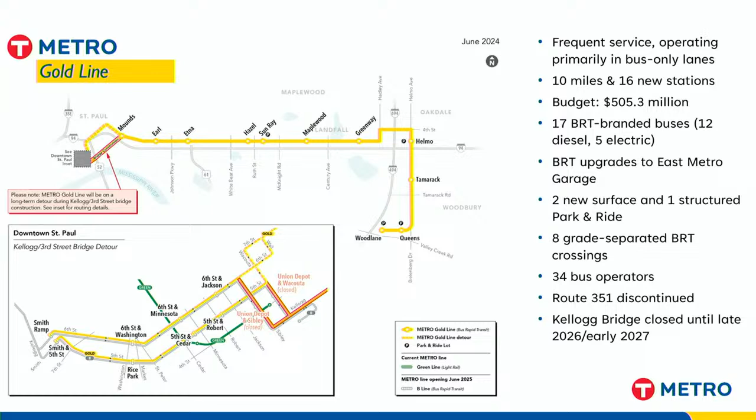We'll be hiring 34 bus operators. The pick started, and training and all the materials are ready to go. Training will start next week for the operators, and Jonathan will talk about that. Route 351, which is an express route from Woodbury to downtown St. Paul, is going to be discontinued when the service starts on March 22nd. And I talked about the Kellogg Bridge.

So Gold Line funding: we have many funding sources for the project. In addition to our New Starts Capital Investment Grant, our CIG grant, we have several regional solicitation grants that add up to just shy of $260 million. We do have state funding that helps contribute to several bridges and pedestrian bridges. We'll show some photos of those, and then of course our local funding partners.

Ramsey County and Washington County have been a big part of the project. They were big promoters and champions of the project since the beginning, and so they're an important part of our service. They're actually also paying for free rides for the first week, we'll talk about that later. And then there's additional investment from local funding partners, since we were doing so much ripping up and reconstructing of roads. It was a great time for our local funding partners to contribute their own funding for utility replacements, trails, lighting, and landscaping.

So I'll show a lot of photos, but just to give a quick overview of where we are with construction. We're substantially complete on both our two larger projects, our civil project and our Woodlane Park and Ride project. There are some crews still working, you might see them. The cold temps the past few weeks have not helped us, but we've had a great winter, which has helped us.

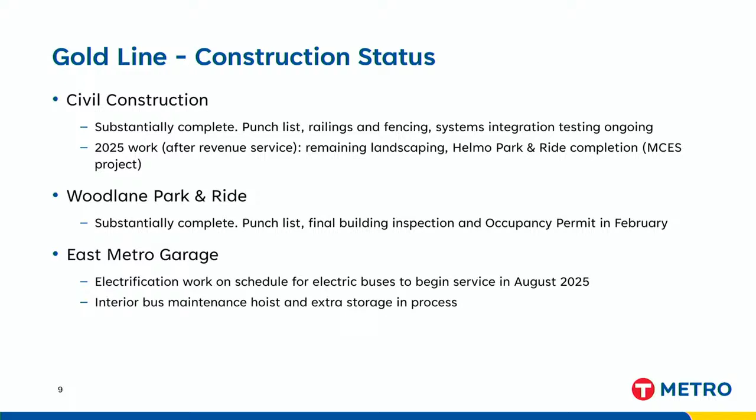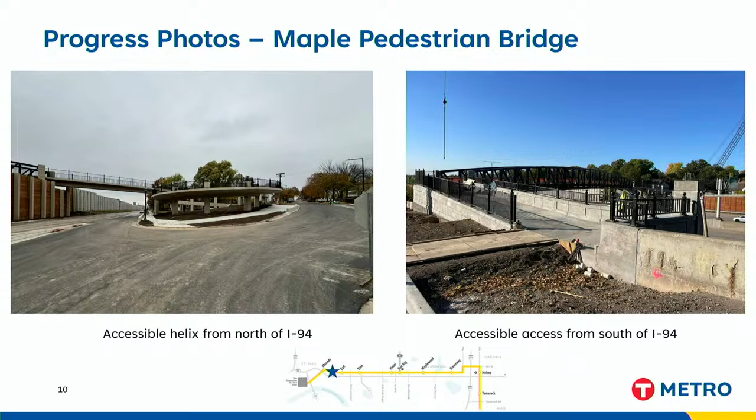So some photos. This is the Maple Pedestrian Bridge in St. Paul. This was a facility that did not meet accessibility needs, and so it was reconstructed. This is one of the items we received additional funding from the state for, but it's actually a pretty beautiful bridge if you like ped bridges, and it's a great asset to the community. So happy that that facility got rebuilt in St. Paul.

So I have a couple of photos showing the guideway. The photo on the left is the Ruth Underpass, that's in St. Paul, and the photo on the right is in Oakdale, on 4th Street approaching Hayward. Just a couple things to point out: the photo on the left is pretty much just north of Interstate 94, so that's where the BRT guideway is in its own dedicated right-of-way. The photo on the right, we're center running with 4th Street on the outside lanes.

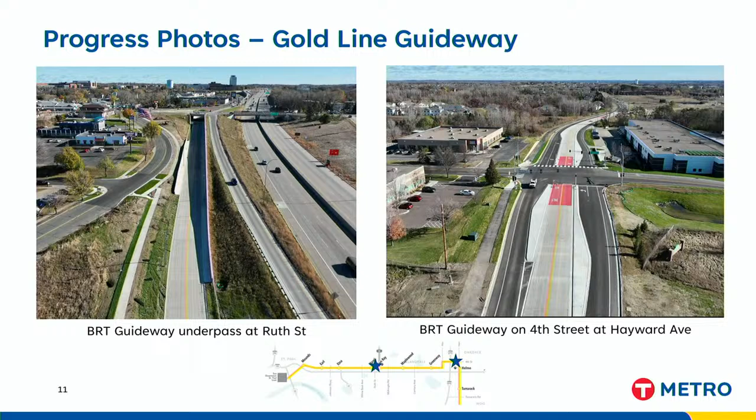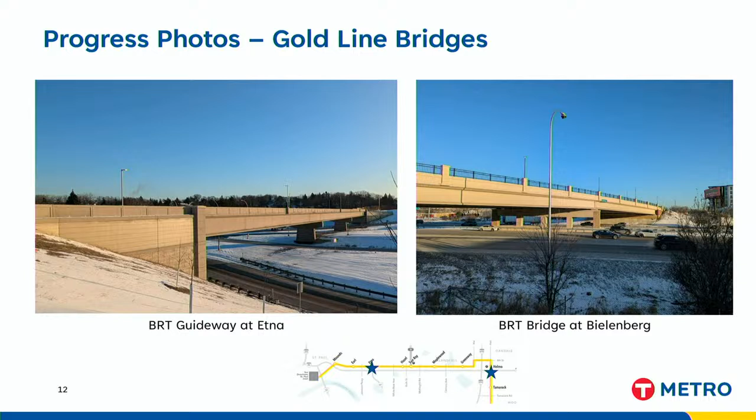Couple bridge photos. The photo on the left is showing the Etna Bridge, just east of the Etna station - it's a BRT only facility in St. Paul. The photo on the right is the new bridge at Bielenberg. This was a completely new crossing of Interstate 94. It took a lot of work to get to that point. This facility will accommodate not only BRT but also vehicles and trails, and it really is a great new connection between Oakdale and Woodbury.

Stations - we built several beautiful stations. The photo on the left is the Earl Street Station in St. Paul. The photo on the right is our only unique crossover station, kind of similar to the 35W at 46th Street Station in Minneapolis, where the buses cross in opposite directions. We're introducing bar signals along this alignment, similar to light rail signals with a vertical or horizontal bar. We have several of these at this station to keep those bus operators safe.

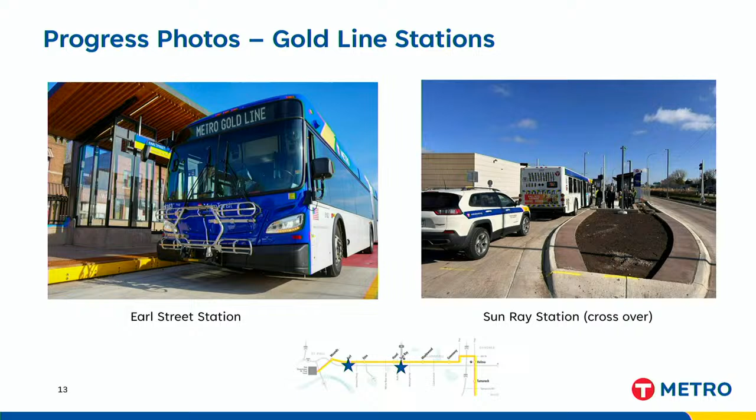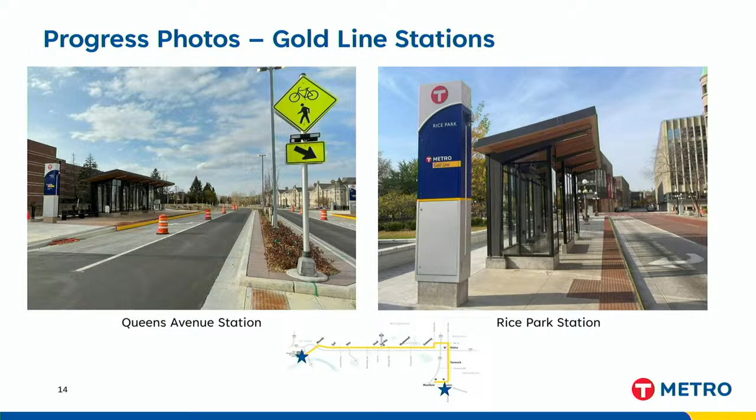More pictures of stations. The photo on the left is the Queens Avenue Station in Woodbury. The photo on the right is one you might have seen in downtown St. Paul at Rice Park. And then, we've done a lot of pedestrian improvements along this corridor, so just wanted to highlight a couple of those.

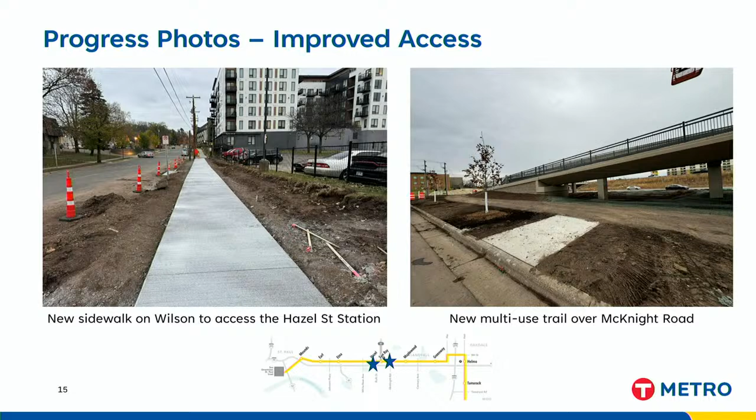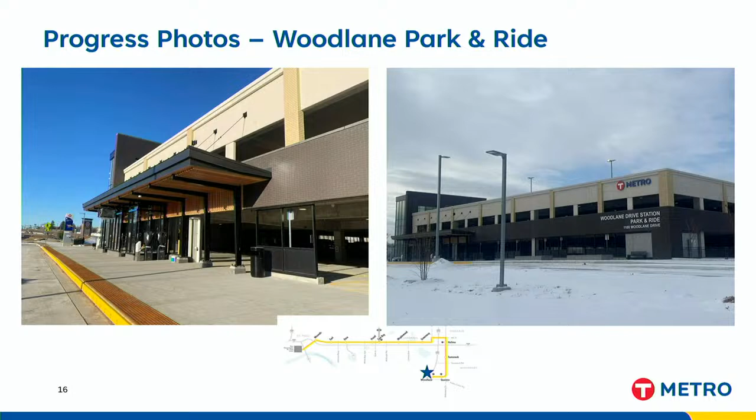And then the Woodlane Park and Ride. This is our large park and ride at the end of the facility with over 500 parking spaces. We also accommodated one of the biggest needs we have in our system for bus operators - there's a bus operator restroom, break area, and quiet room at this location. We also have storage for facilities under the speed ramp as it goes up. There's a huge room for storage, which is great for facilities maintenance.

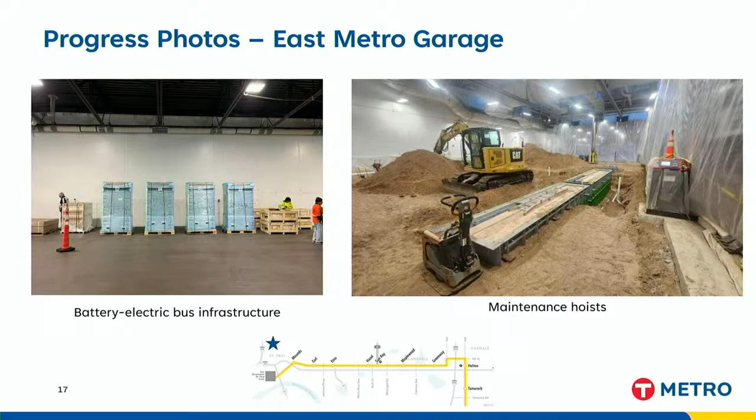And then finally, East Metro Garage. The photo on the left is showing the battery electric bus chargers, and the photo on the right is installation of one of the new hoists.

As you can imagine, with this much new infrastructure, one of the items our staff is working on feverishly right now is operations and maintenance agreements. We have many agreements that have been executed and some in progress still. We have general infrastructure agreements - hopefully next week we'll be routing an agreement for execution with MnDOT for O&M for the entire facility. We're still working on details with St. Paul, Maplewood, Oakdale, and Woodbury for general O&M agreements. We also have agreements for traffic signals, for TSP, transit signal priority, and for bridges. And then finally, we do have 2 executed agreements with Washington County.

They're doing all the plowing on the guideway, from Mounds Boulevard out into Woodbury. It's been a great winter for them to practice and get this under their belt, and we've had a lot of back and forth. It's actually been a good experience for them to learn the corridor without a lot of buses. I think everything is going really well on that.

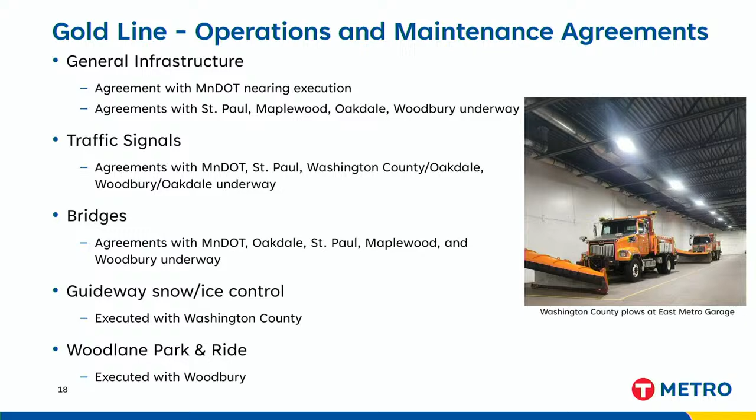And then our own facility staff will do the snow removal at our stations. And then finally, we have an executed agreement with the city of Woodbury for the Woodlane Park and Ride. All right, thanks.

Good afternoon, everyone. Andrew Brody, Director of Safety for Metro Transit.

I could probably talk for hours on this subject, but I've been told to keep it under a couple minutes, so lucky for you guys, you don't have to hear all that.

But safety and security is very important in a project like this, given the size and scope of it. It's one of those things that we take very seriously and value, starting with the design, and we follow through all the way to completion, looking to complete that on time for opening day. But what is safety certification, and what is the abbreviated process? It's basically to verify the safety and security readiness of a project for public use. That is required by the FTA for projects over $100 million, but that's not the only reason we do it. We ensure the safety and security of our employees, our customers, and our communities where we operate - it's extremely important. So that's why we do it, but it's not only a requirement for the FTA, we need to do it to ensure the safety of everybody.

Mr. Chair, if I can just - yeah sure. So, and that's ensure, but we also insure, and I've learned a lot from Phil over the years on how super important it is to get all of this figured out, and then Phil goes out and explains it with the insurance companies, actuarials, or whoever all those people are, and then when we have to go back to lines that have been built recently or years past, and still prove that they are very safe and have all these certifications. So thanks to all of you. We have a really good reputation, and a variety of insurers willing to work with us because of the hard work you're doing. So I just wanted to say that comes up in management every now and then, and I think it's one of those things that's kind of invisible but super important to the work that we do, because if we can't get the insurance, we can't do what we do.

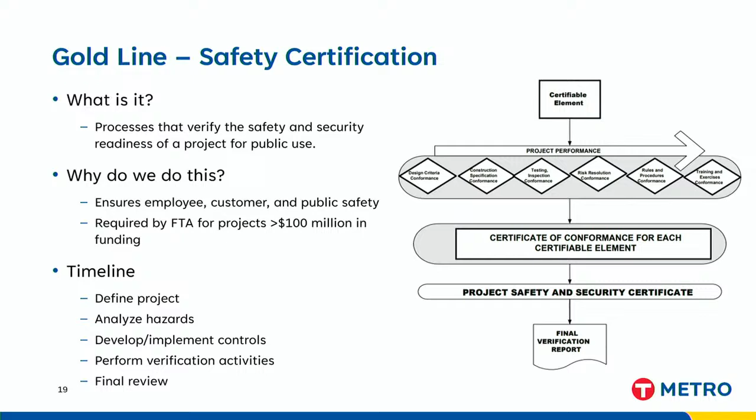Which part of the safety certification actually leads me into the next slide, our emergency drill. We conducted an emergency drill on November 12th, 2024 this last fall. It was at the Helmo Ave station, and we did that in partnership with many different partners.

I don't know if I'm going to name all of them, so I apologize if I forget you, but Oakdale Police and Fire were there, City of Woodbury, Woodbury Police Department, Washington County, St. Paul Emergency Management, Maplewood Police and Fire all came together on this day and really walked through how do we get access to the dedicated right-of-way and making sure people understand it's not just a regular right-of-way, there's only certain entrance and exit points.

The biggest thing people wanted to understand is the electric bus. So we had maintenance personnel on staff to walk specifically the firemen that were there through where to cut if you could cut, or where not to cut, where the emergency power is, and just walking through the different scenarios was extremely beneficial. And we aren't stopping there.

We're working with the stakeholders in partnership along the corridor, and the City of Woodbury actually has two exercises, April 8th and April 22nd, that will be bringing a battery electric bus out there along with maintenance staff as well to walk more people through it and ensure they feel comfortable responding to an exercise like this.

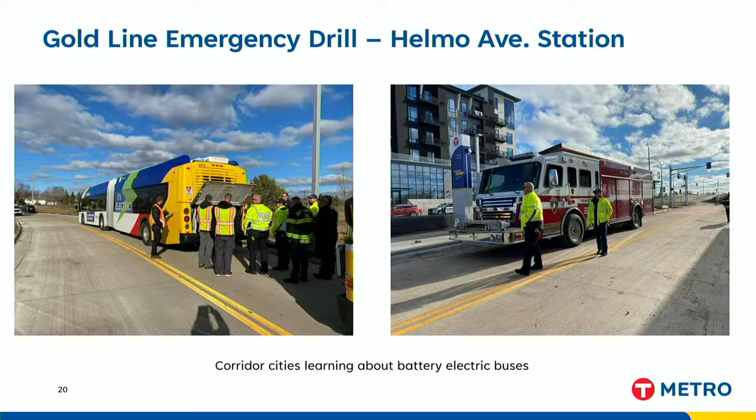My name is Jonathan Ahn. I'm the Assistant Director of Route and System Planning here at Metro Transit. I've also been serving as the operational lead for the Gold Line project. So we're here to highlight some of those activations and implementation efforts we've been working on for some of the Gold Line project elements. We're really folding this new project onto our family of services and operations, making sure every single internal department, and especially our frontline employees and operators, understand the differences of BRTs and dedicated infrastructure so we can run those smoothly on opening day.

We're also doing a lot of testing work on elements highlighted here, including red guideway, bar signals, and transit signal priority elements. Those aren't just signals controlled by the signal controller; they actually communicate with transponders on the buses, so buses talk to the signals and get extended green time or signal changes. We're working with our municipal and roadway partners to make sure buses run smoothly instead of stopping at red lights, which also helps meet FTA requirements for the project.

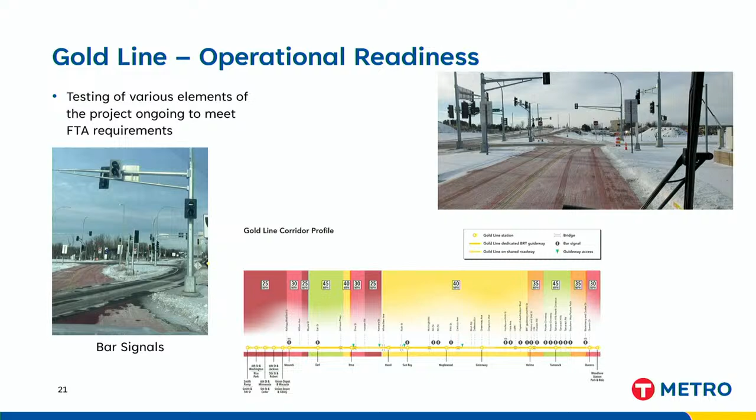The bottom image is a handy corridor profile showing where guideway entrance and exit points are, where bar signals are located, and color-coded speed limits we've set for the guideway, so we can communicate this to our operators, emergency vehicle operators, and agency partners.

I wanted to highlight a couple more training efforts. Gold Line will operate out of our East Metro garage, with March service starting March 22nd. Operator picking, meaning choosing which route they'll drive including Gold Line, started this past Monday. Operators are already picking Gold Line, and once we have a sizable number choosing it, hopefully by early next week we'll start garage-led and instruction center-led training activities.

There's a small item I wanted to highlight: to accommodate Gold Line and our fleet requirements, we're introducing a couple of new procedures and maneuvers. One is a relief car, meaning we use a car as a tool to move drivers to the end of the line and switch drivers at the end and beginning of a shift instead of driving a bus back and forth. That reduces our fleet and bus requirements, since cars are much cheaper than buses. This is a new thing we're trying out with Gold Line.

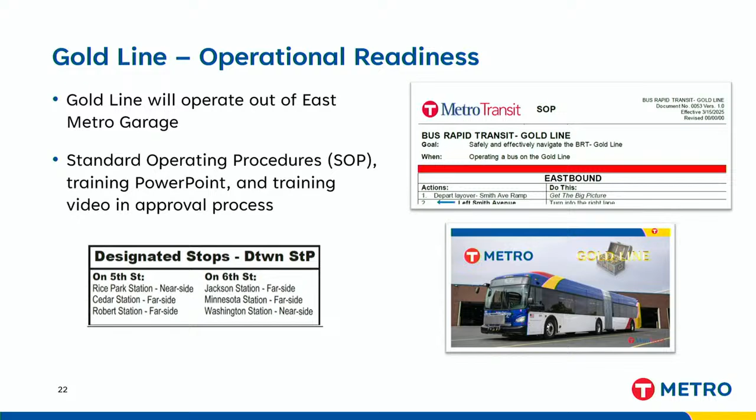And I'll hand this over to Adam.

Good afternoon everyone, I'm Adam Harrington, Director of Service Development. Just to put a bow on Gold Line as far as the planning that's gone into this, a lot of great work has occurred to get to March 22nd, and we're really excited about that.

Other suburban partners and providers have been doing this for a while, so this is our first foray into operating in this environment, but we think it's a great way to connect people to Gold Line and throughout Woodbury.

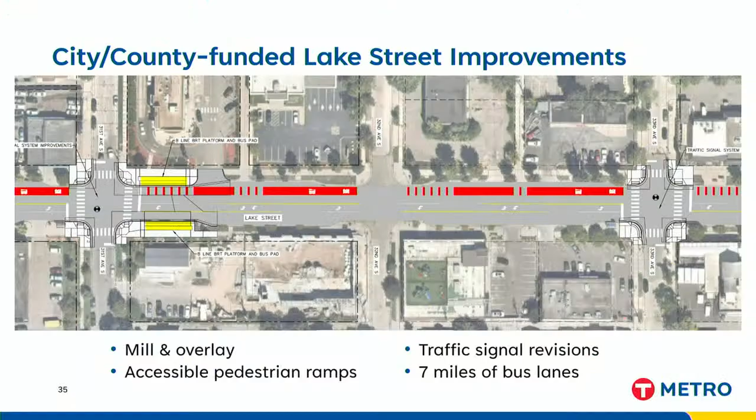Throughout construction, over the last two construction seasons, our community engagement team, led first by Cody Olson and then by Sia Bell, took lessons from previous BRT projects, the D-Line and the C-Line, and used them to come up with this great mix of different methods to reach stakeholders early and often across the corridor.

I won't read every method here, but some of the quantifiable highlights: over 40,000 addresses received a postcard to make them aware of the upcoming construction and provide contact information. Our team knocked over 4,000 doors, both before and during construction, to raise awareness and make a connection. Our community engagement coordinators held office hours over 60 times and sent weekly newsletters over 50 times throughout the last two construction seasons.

When you're door knocking at small businesses along the corridor, what was the typical feedback? Were they fretting about losing customers, or was it more like, hey, this has been great, or somewhere in between? And when you knock on a door, you never know who you're going to get, it could be a part-time employee or the owner. So what kind of feedback did you get?

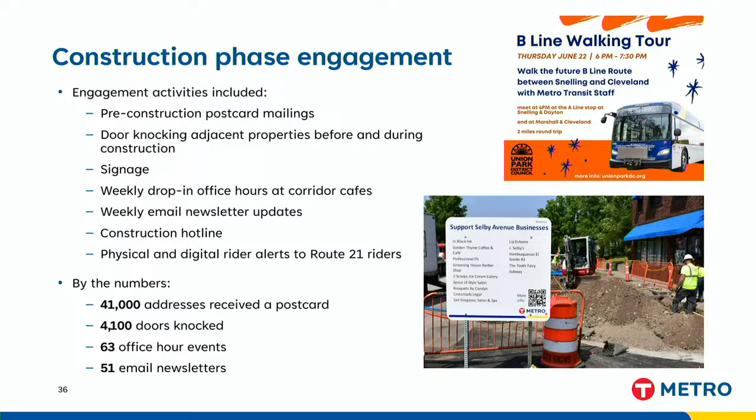On that same feedback, having heard from businesses, I think the community engagement folks were great in establishing meetings in the community during that construction period, which was very helpful. The one thing I'd say is it's never timely to give these notices, so people focused on their businesses and challenges were sometimes unaware they'd heard from us. That's a lot of the feedback you got during that period, and they weren't prepared for parking and directional issues. As soon as they communicated, there were quick responses from the project office, and relationships were created along the Selby Avenue corridor that can benefit us into the future.

One thing I'd say is that door knocking should maybe be done closer to project start. I know it's important to do outreach early, and maybe the postcards are that. But the door knocking and real visibility needs to be close to the start of the project, with an emphasis on close to, so people can't say they hadn't heard from us. They may have forgotten, but in this case we want to make sure they're very aware and prepared.

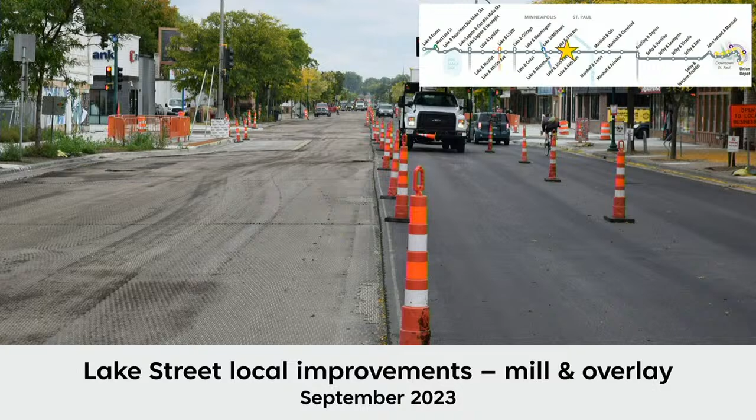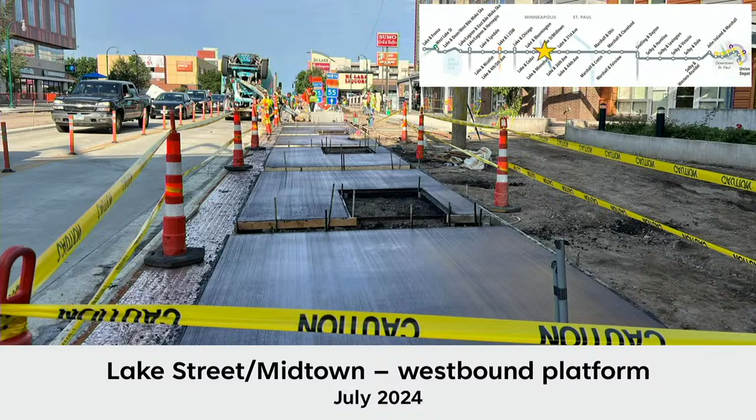Here's Lake Street Midtown, the transfer point between the B Line and the Blue Line LRT. This was a very busy and active area in 2024 because in addition to our station construction, MnDOT led a full reconstruction of the Hiawatha and Lake interchange, right behind the photographer. There was a lot of coordination with MnDOT, both at the staff level and at the contractor level, to deliver all these improvements during the same construction season, and it worked out.

Here, just a little bit west of there, an example of some of the safety improvements we constructed through agreement with Hennepin County - this is a pedestrian refuge in the middle of a non-signalized intersection.

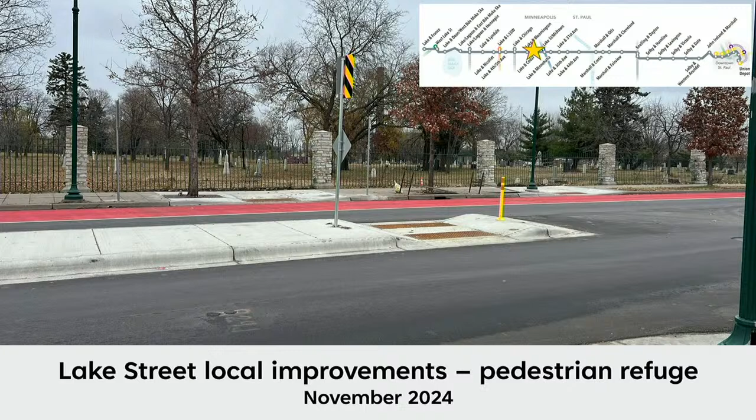Here's Lake and Chicago, shortly before that station opened in the fall. You can see crews installing the new pylon there in anticipation of that station opening at the same time as the closure of the Lake and Chicago Transit Center.

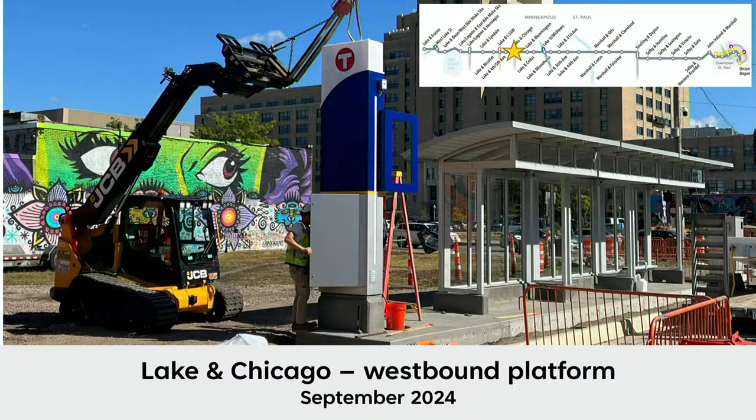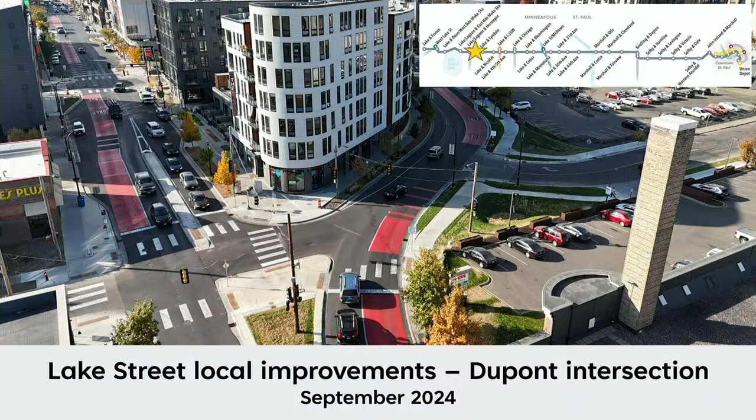Mr. Chair, can I just? Yeah, go ahead. Quick question too about the red bus lanes, which is great because you can't miss them, unless it's winter, but then it's Minnesota anyway. But how did it work? We had a pretty easy winter, but when those winters give us big snowfalls, how does it work? My daughter just moved to Uptown not long ago, so when the snow was coming, I'm like, the lanes are there, there's nowhere to go. Pretty soon you have to be in the bus lane, or the bus has to be in the, so how do we work with our local public works crews to get out there and plow as soon as possible, or remove it out of the street? That was challenging, and I get it, it's Minnesota, but there's nowhere to put this stuff in a lane or on a sidewalk, because somebody's gonna be impacted, so I'm curious how we work with the locals who have to plow this. To keep it, are there priority roads maybe that they go to first or more often?

Yeah, Councilmember, I'll start. That's a really great question. Winters can be challenging for bus lanes because of that storage issue. In the case of Lake Street, it's a major arterial, so by nature it's already a priority route for the local entities that plow it. So that definitely helps.

Yeah, Mr. Chair, Council Member, this is a really good example of where the scale of how we make these improvements is a little bit different on arterial BRT, where there is an existing maintenance agreement in place between city and county when it comes to dealing with snow on this street. Through this project, we've changed that lane configuration, but that function and that relationship remains intact. Through our operations team, we have a lot of ongoing relationships with our street authority partners that help inform a lot of these discussions on an ongoing basis. But by and large, the approach to clearing snow in these areas remains largely as it was before that bus lane was implemented, when that curbside space would have been a general purpose lane as opposed to a bus lane.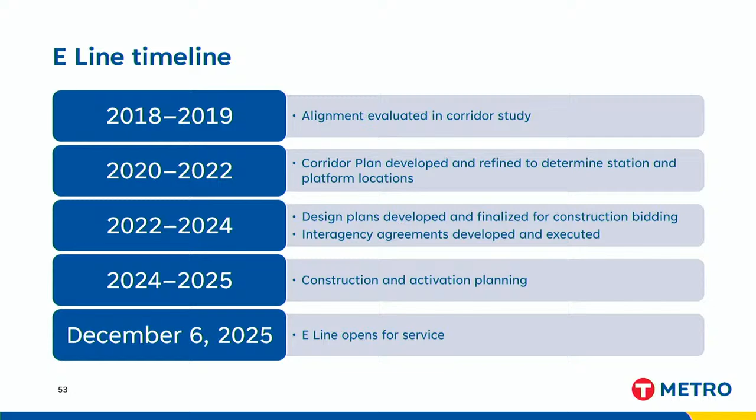A little bit on E-line funding: $64 million is the authorized budget. Again, reflecting what we've heard on the B-line, there's additional funding that Hennepin County and the city of Minneapolis have brought to construction of improvements along the E-line corridor that are being delivered in coordination, $11 million in addition to the E-line project budget.

Agency partnerships are absolutely critical in terms of how the delivery of the E-line has been shaped. Whereas the B-line constructed a long linear portion on behalf of our partners, on the E-line we've had quite a few platforms constructed through linear projects led by partner agencies. In fact, 25 of the 66 E-line platforms have been or will be constructed in such a fashion, through projects led by the city of Minneapolis, Hennepin County, and MnDOT.

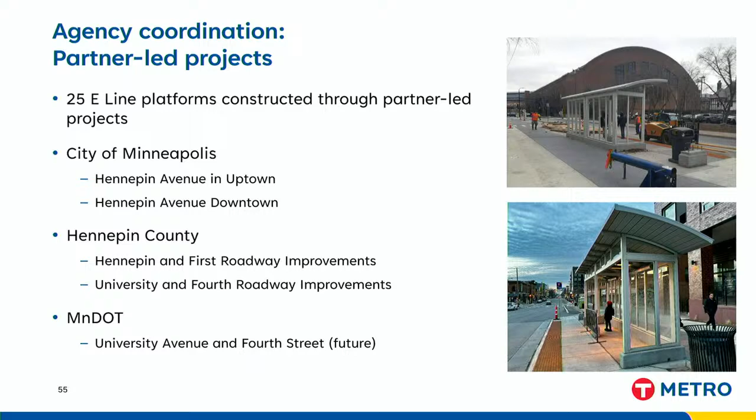Here are a couple examples of those platforms: constructed through the county's project on University and 4th near the University of Minnesota, and here, Hennepin Avenue in Northeast, another county-led project, and the Hennepin Avenue project in Uptown led by the city of Minneapolis.

2024 was an extremely active year of construction in our region. A big goal of coordinating a lot of this construction with other projects where we can is to try to minimize the disruption that happens across multiple years, and really concentrate as much of that work as we can, working with our partner agencies in these areas.

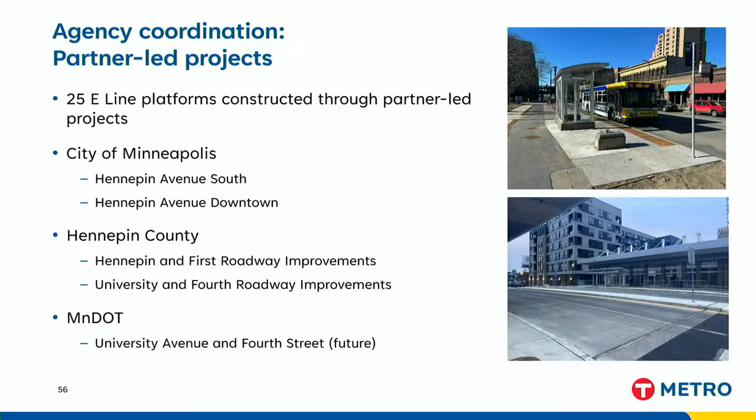The flip side of this coordination is where our partners have brought their funding into our construction contracts to deliver additional improvements. Many of these, in the case of Hennepin County and the City of Minneapolis on the E-Line, have really focused on pedestrian safety. You can see some of the improvements here.

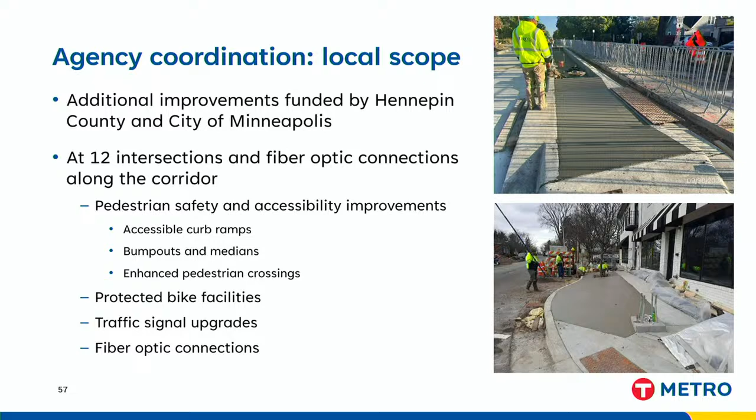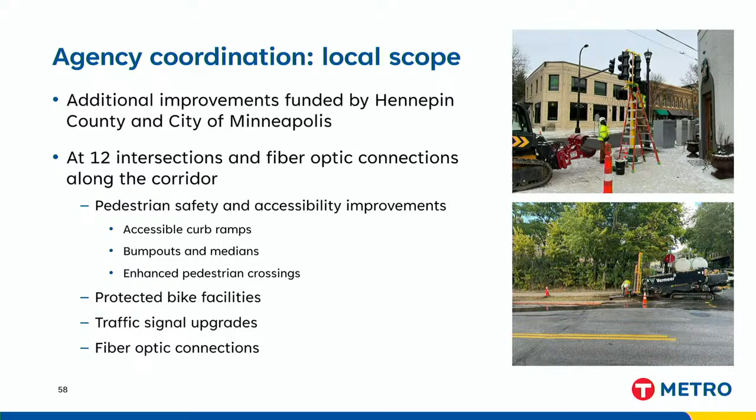There's a new median going in near France and 54th Street, a new bump-out being constructed near France and 44th. Here's a new signal being installed at Sheridan and 43rd, and installation of what will be a shared fiber optic connection, the conduit being installed along 36th Street.

Reflecting a lot of the lessons learned throughout the development of the arterial BRT program, not least the experience of the B-Line, we've taken many of those same tactics and approaches. Eric Thompson, the community outreach coordinator for the E-Line, has been tireless in trying to get the word out about E-Line construction, answering questions through a variety of venues, reaching folks through postcards and mailings, emails, in-person door knocking and office hour opportunities, as well as group presentations and a lot of individual emails and phone conversations.

John: I just want to comment, I thought you guys did a great job responding to the local businesses on both 50th and France and 43rd and Upton over the construction period there, and there were a lot of challenges. They would jump up, and we got to a point where it was weekly meetings, I think, over at Linden Hills. So thank you for the work here, because it was, and rightfully so, they lost a lot of business there, and it wasn't just our project. It was the city of Minneapolis and the water work they were doing over there. Every time I turned around, I think both Angela and I were kind of like, okay, what's happening? We said next week, that ain't happening. They said, we said next. So I just appreciate sticking with it.

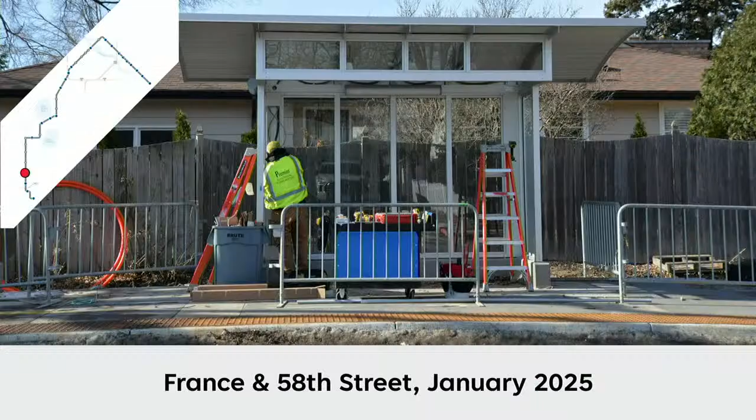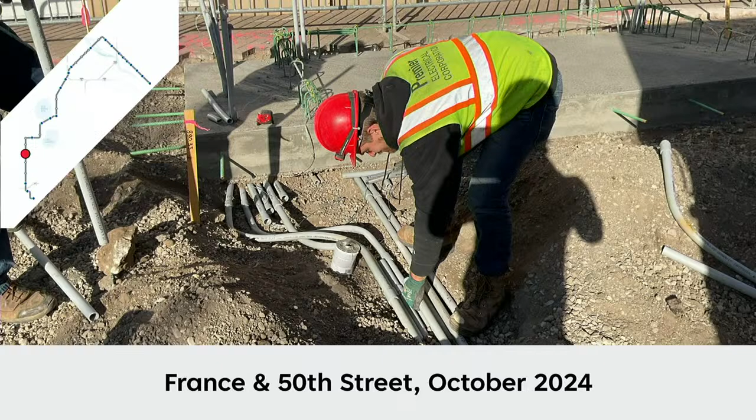I will share just a few photos here of construction on the E-line over the past year. Here you see electrical equipment going into a shelter at France and 58th Street. This is just last month. Here's some conduit communications and electrical connections to a platform at France and 50th.

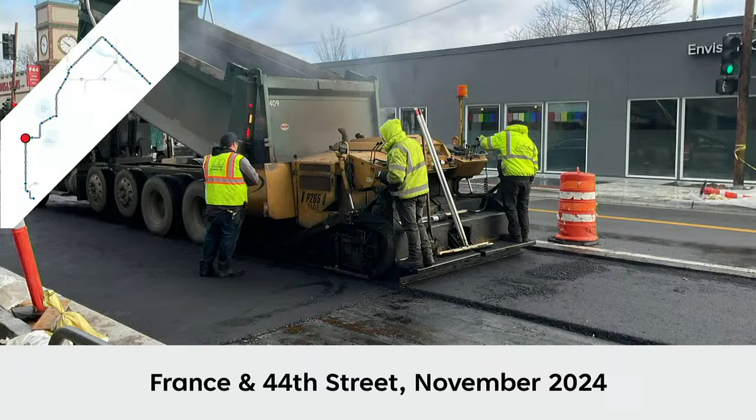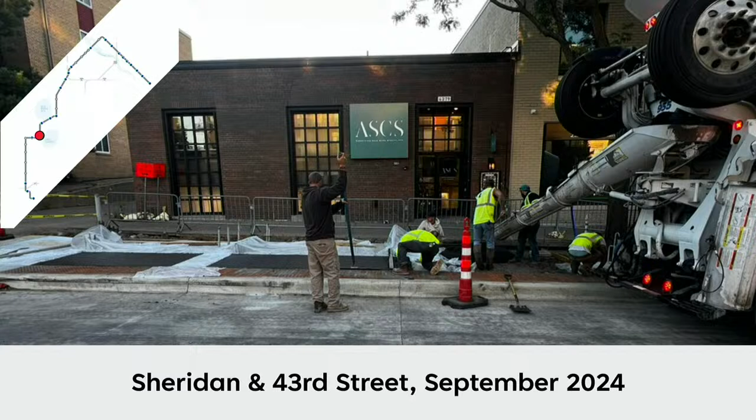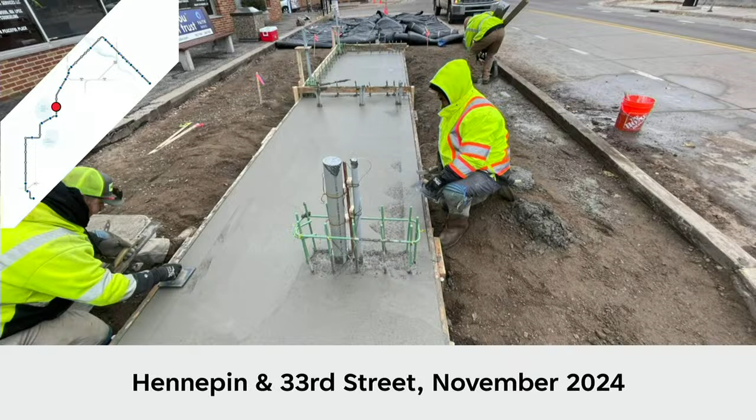Some of the pavers being installed at France and 50th as well. Crews putting down a new roadway surface here along France just south of 44th back in November. Preparation for pouring a new platform at 44th Street and Abbott. Here you see that platform being poured at Sheridan and 43rd, that specialized concrete color that really marks the platform area at BRT stations. Here's the foundation for the pylon and shelter at Hennepin and 33rd Street.

One thing I'll note here is that this station had a little bit more of a smaller scope because a number of years ago, the city of Minneapolis rebuilt this roadway with the E-line in mind. So you'll see that the existing curb here was in place, and all of the work that we needed to do was behind the curb.

And again, here going all the way to the northern end of the corridor, we've got an operator restroom facility that we're constructing for the E-line as well. And here you can see the foundation for that being poured in January.

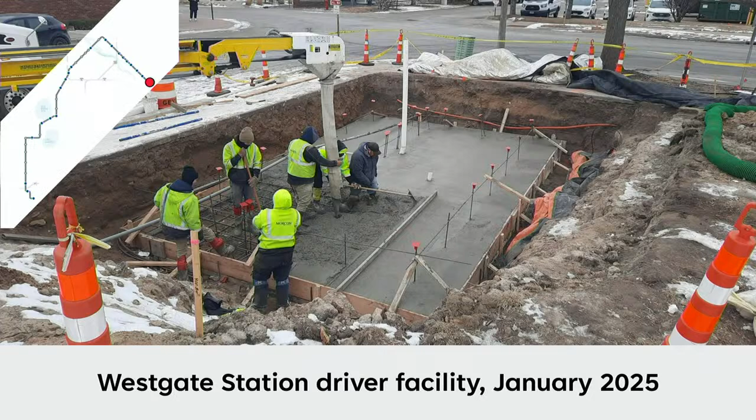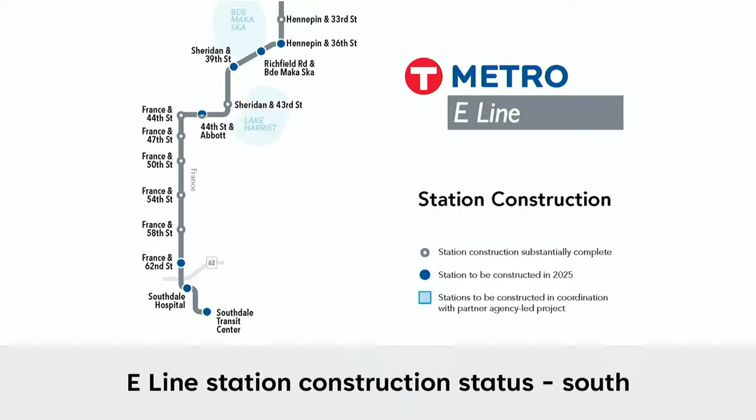Here I'll just mention the status of where we are. You see those gray circles are the places where construction has been substantially completed, and the blue circles are what we've got on the plate for 2025. So here's the southern portion of the corridor and then the northern portion of the corridor as well.

So with that, I'm gonna go ahead and hand it over to Adam Harrington to talk a bit about service on this work. Yeah, Ryan.

Just, thanks, Mr. Chair. One question, because the chair and I were in a meeting earlier today where we were told no one rides the buses, they're all empty, that common refrain. I just wanted to ask, ridership on the B line or in the 21 corridors, somewhere between 10 and 12,000 a day, is that about right? I think pre-pandemic, that sounds about right. Post-pandemic, it's still really, really strong. Okay, and then what's the ridership on the 6 or that becoming the E line, any sense? Yeah, 6,500 range, I think. It's good to know that under existing, this is somewhere around 18,000 individuals a day we're talking about riding across these two lines. It's helpful conversationally when we're out talking about the program, so I just appreciate it.

Oh, go ahead, John. Yeah, Mr. Chair, members, just a quick question on the 6. Now, I'm still a little confused, but the 6 is right by my house, that's one I use. So are we going, once we get to Sheridan and 39th there, are we going up Xerxes? Are we going up France? Mr. Chair, this is an excellent transition to Adam's portion of the presentation.

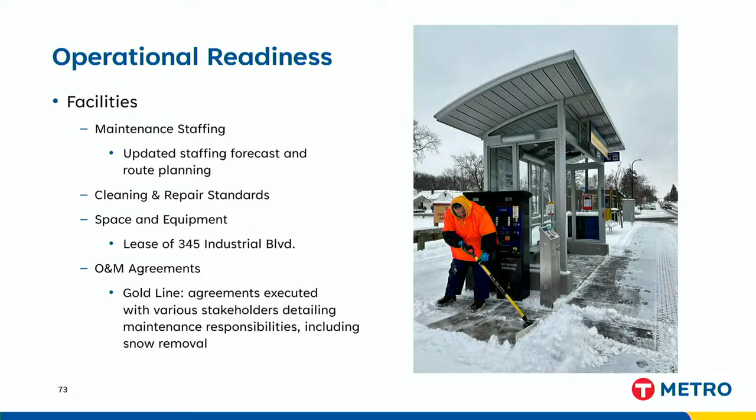Chair, council members, good afternoon. My name is Joe Dotseth, I'm the interim chief of police at Metro Transit, and I'm here to talk about system-wide presence. Our system-wide presence plan for any additional lines is very simple, similar to what we've been talking about in the Safety Security Action Plan.

The Real-Time Information Center, much like the Safety Security Action Plan, was a real game changer for us, having operators up there all the time, constantly looking at surveillance systems and cameras throughout the system. Our community service officer program is rapidly growing, and they'll be out on the system. Supplemental security is certainly an option. And then there are the community-based partnerships we have throughout the system. All of the stuff we're currently doing with the safety security action plan, and seeing work on the system, will be part of the plan for system-wide readiness for all the additional lines.